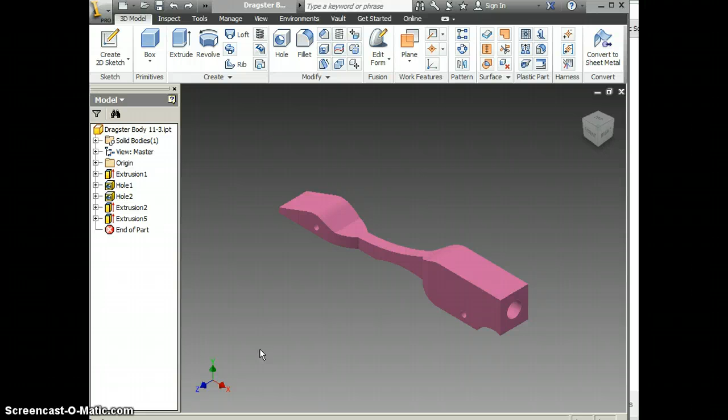To begin with, you need to have your dragster body open. You can do this even after you assemble. Then you've got to come up with some images to use. So let's say my car could really use a sweet unicorn.

So I'm going to do an image search, and while there are a lot of sweet unicorns on this page, I think this one would look pretty awesome on my car. So I'm going to right-click and save this image, making sure I save it to the proper place.

I need to find my H drive, my GTT folder, which is where I'm making everything, and then save it in my dragster folder. It's important when I save this... I think I may have to save it as a BMP. I'm going to give this a shot and see what happens. That wasn't an option, so we'll see how it goes.

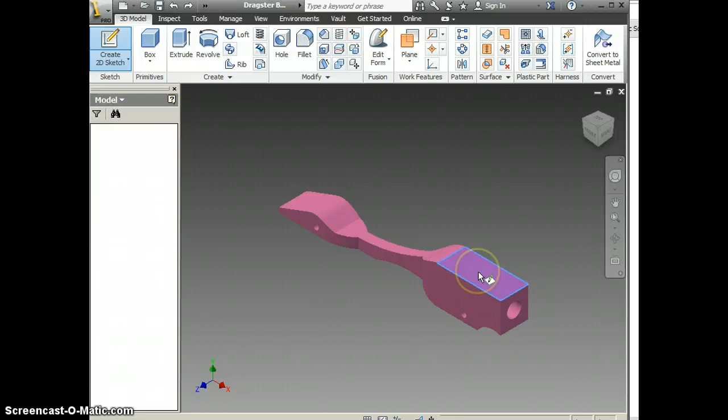Once that's done, I need to put a sketch where this is going to end up going. Then I need to come up here to Insert Image. Now I find this image, and I put it where I want it to go.

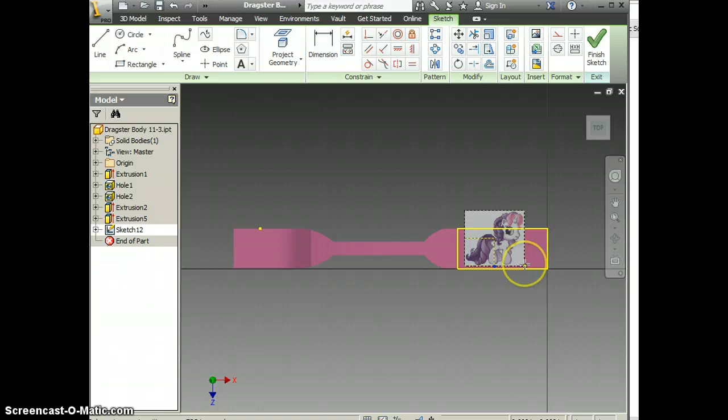And it worked, so I was wrong about the BMP thing. Now I'm going to right-click OK. Now you can dimension this thing, you can move it around. Grab it by the corner and make it bigger, like you can with a lot of other images.

So I'm going to move this thing to about where I want it to go, and I'll go ahead and finish my sketch. Now that looks like it's on there right now, but it really isn't. So once I finish my sketch, I've got to come up here to Create, and I've got to make a decal.

Right now image is selected, so I want to click on the image. Now it's asking me for the face I want it on, and that face would be right here. And that would work like that.

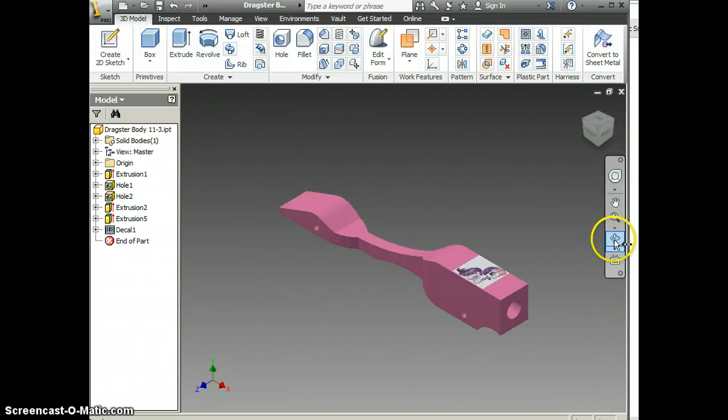If you want to put something on a curved surface and have it wrapped to the curved surface, you've got to use a work plane. Some of you probably remember this from the pegboard, but I'm probably looking at the XZ plane in my case here.

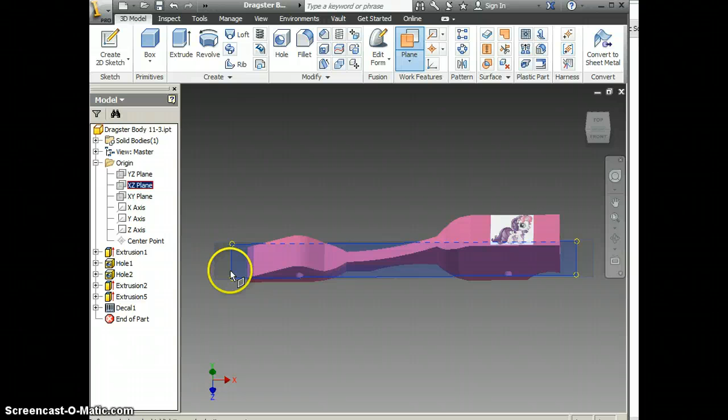So I'm going to click on plane, XZ plane, then pull it up above the part, hit my check mark. Now I've got a work plane there, and the process is going to be the same - I'm going to go ahead and put a sketch on here.

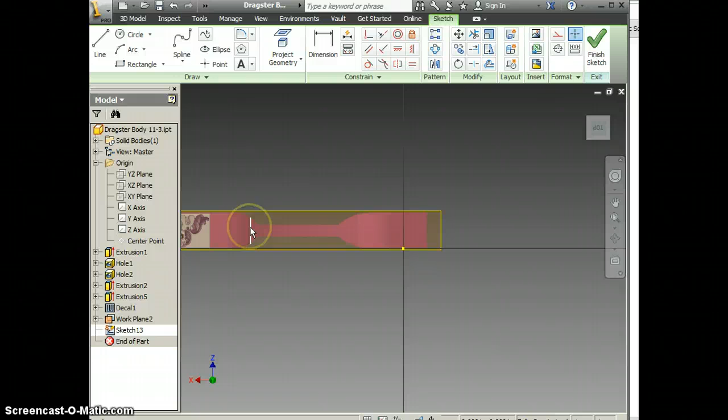I could find another image if I'd like to, but for the sake of time, I'm not going to do that. But I do want them both to end up facing the same way. I want to insert image, find my wonderful unicorn again. Hey, it's upside down - that's okay.

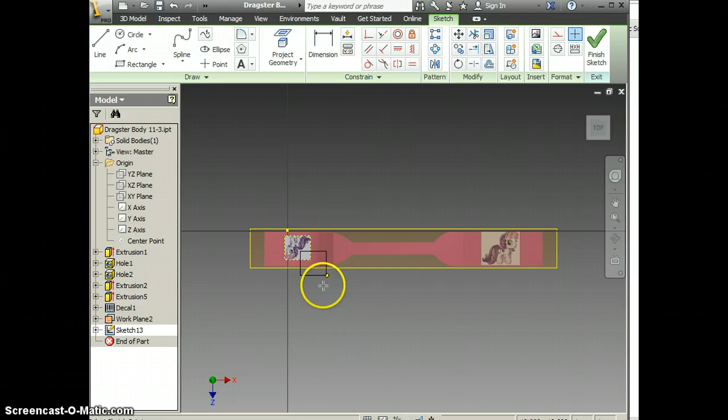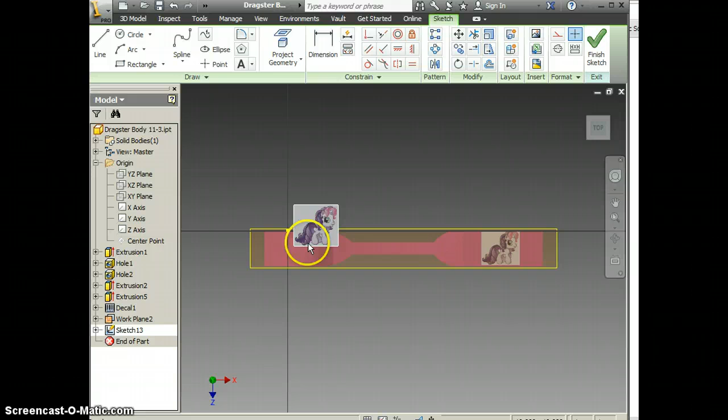I want to grab this thing, stretch it out. I can even flip it around here. Sometimes they're a little funky to move. Come on.

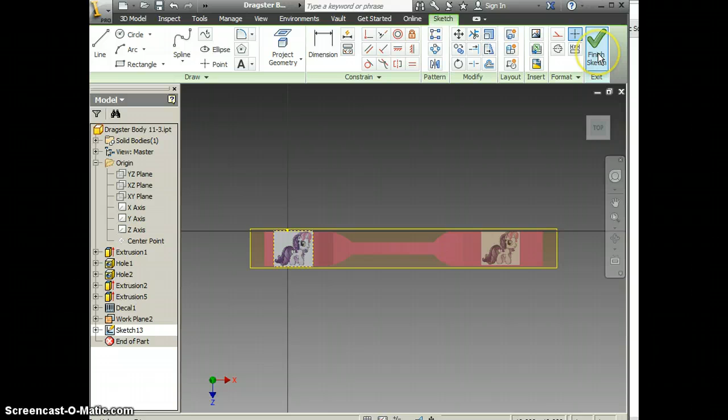Like I said, you can use your dimension tool here, do some constraints and things like that. But I will go ahead and finish my sketch and go up to Create Decal.

Click on the image. I want to wrap to the face this time since it's round. Click on the face, click OK. And that didn't quite work out like I thought it was going to. Let's try that one more time.

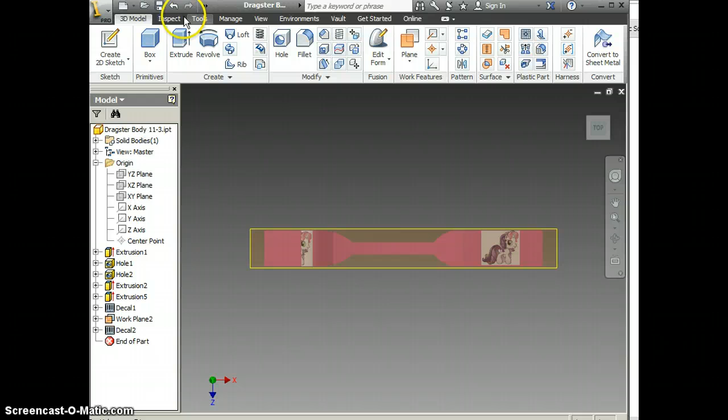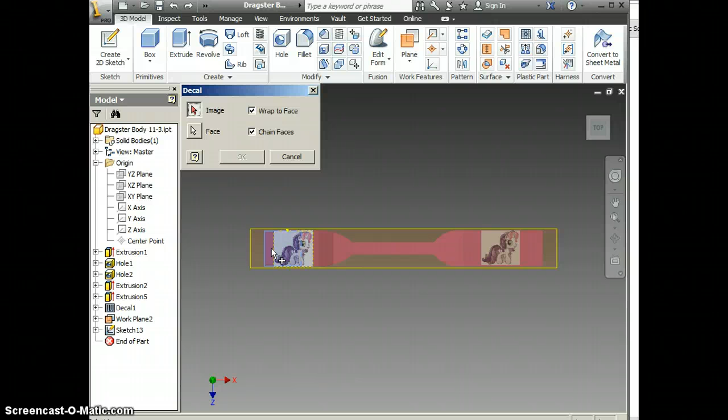It might not work on this round face here, so we'll go Create Decal, Image, and it's probably going to cut the other half off. So let's just slide it over a little bit here.

Back to sketch 13. I'm going to grab this thing, try to slide it down a little bit and see how that works. Finish sketch.

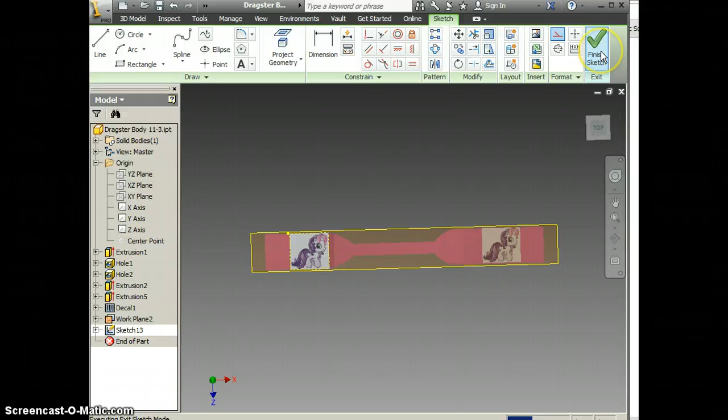Create decal. Image. Face. And we lost a little bit of it again.

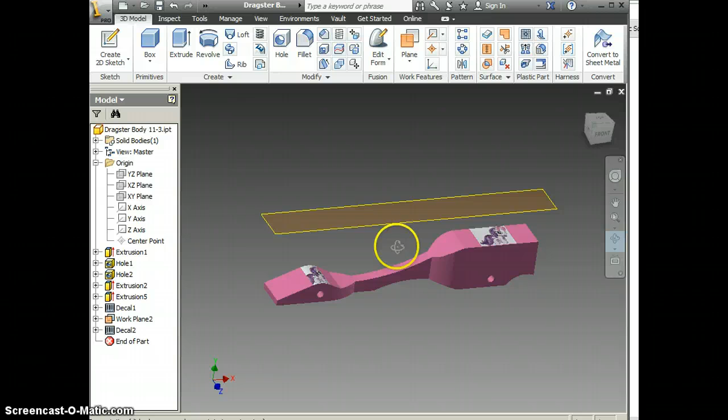That's something I'll have to work through and show you guys in class - I haven't done that for a while. So you get the idea; I think you guys can troubleshoot it a little bit. I can shut the visibility off on this work plane.

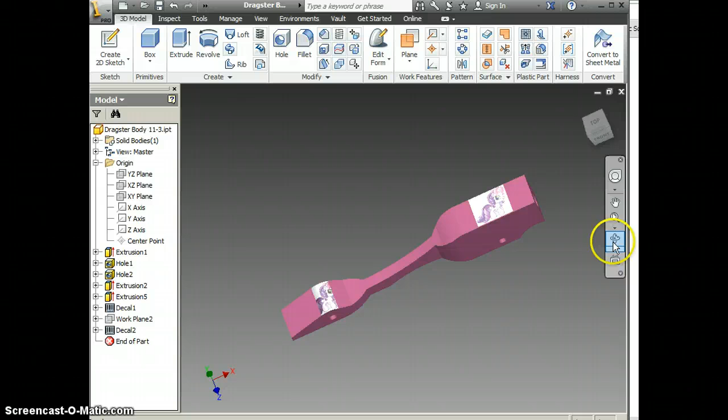Get a little better look at my car. If I opened up my assembly after I saved it, that would be updated there also. So there's an example of putting a decal on. Like I said, you can put them on all over, and usually wrap them around parts, even though I had trouble with it today. But give it a shot if you're done - customize your car a little bit.